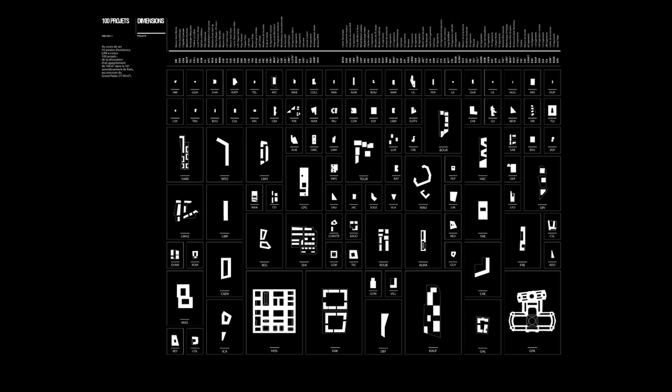So as you said, LAN means Local Architecture Network. We started the practice in 2002, then in reality it was 2004. We were extremely lucky to do, in like 15 years, more than 100 projects, very different in terms of sites and typology. This is the diagram of the ongoing projects, which go from 100 square meters to more than 100,000 square meters. As you can see here, there is just a selection of them.

We do housing, office, institutional buildings, theater, and museum. We are doing the extension and refurbishment of the Grand Palais, which is the biggest French museum, archives, prison, bank, fire station, and now we also do master plans, and we build part of the district that we designed.

So it has been a very interesting trajectory that doesn't put us in a specific field, which is a bit of a danger when you go out from school and start a practice, because they ask for references every time. So if you are lucky enough to do one project, the first one will be the one that marks your career.

So you start with housing and people believe you know how to do housing. In reality, you don't know anything, and you can apply the same method to whatever the typology is. But this world is built around...

...being reassured by references. The studio is a European territory, in the sense that let's say 40% of the studio are French, the rest come from all around Europe. This is a map that we update every year or every two years, or to be sincere, when we have time. But it's about creating and trying to represent the territory of the studio, the influence of everyone, and all the cities they come from to be part of LAN.

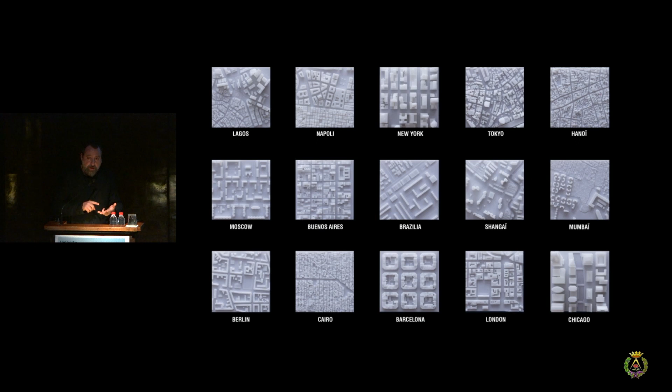He says two simple things. First, a city is a man-made object, so like all objects it has rules, physical rules, so you have to understand these forms. It's a scientific approach where you have to understand how things are made — the form, the materials, the period, the structure. So you can explain everything through an analytic approach.

But then he had another layer, which he called urban fact. Those facts are all the stratification of politics, historic facts, whatever level goes from that abstract image to this very specific one, which is about memory and identity.

So as an architect, in LAN, and I think in what I do in school, we try to understand both: the very technical and scientific approach that teaches us how to read the city, and then, as an architect, we decide which kind of memory we want to take and develop. So there is a level of subjective approach which stays in this second level. We try to be contemporary in the way we read the world and classic in the way we understand our work.

And everything is about form. Aldo Rossi says the city has its form and the urban fact has its form. And form is a word which is overused in architecture. Everything is form. The definition I want to share with you is the one of Paul Klee, who said form must on no account ever be considered as something to be gone over with, as a result, as an end, but rather as a genesis.

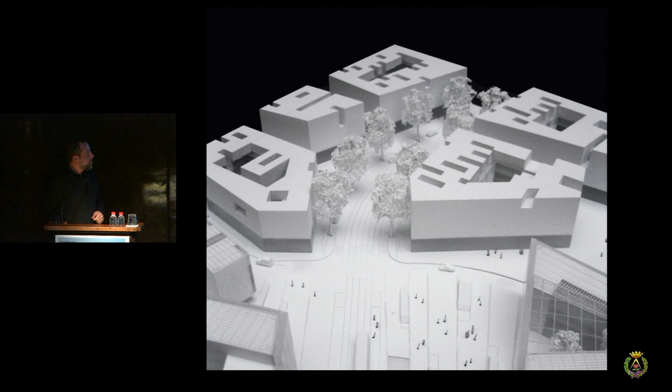And they did a competition on that, which was just for a master plan, won by a Dutch studio called Tania Concko, with a simple idea that in Spain and in Italy we know very well: a building is a mass, and the limit between public and private is the facade of the building. Inside it's private, and you can have a courtyard. So a building is a block, large enough to define, with its own standing, the public space on the surroundings. So she created these 3, 4, 5 masses to define the street, to define the piazza, and to create a model which was totally the opposite of the one that was there before.

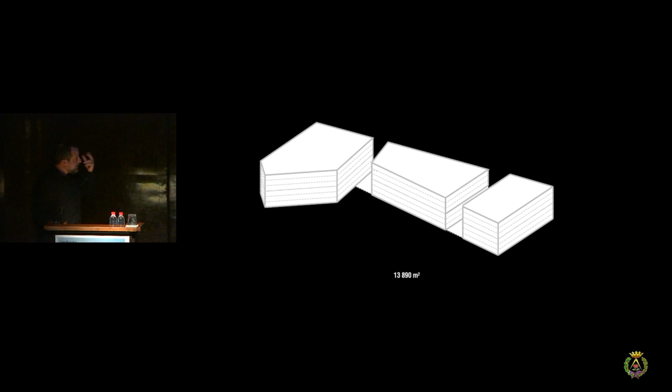So we were invited to a competition for these 3 blocks on the left. When you win a master plan in France, you set the rules, the urban rules, through which the architects have to build — you decide how high you can go, which is the density. So she built an entire system made to create masses on the scale of the public space. But the problem was that the competition allowed us to build 14,000 square meters, yet the competition was done in 2008, during the financial crisis, and the investor decided to ask for only 7,000 square meters.

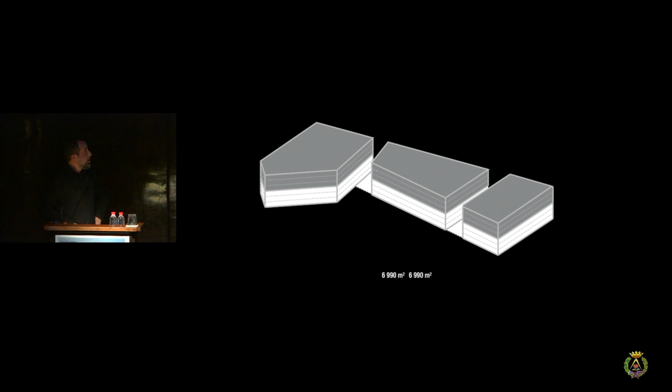So with a small house of 2 floors, or a building of 2 floors, we could achieve the surface objective. But it was very interesting for us because this gray space, this undefined space, was the beginning of a research that we did at the time, where probably it was before an intuition and then it ends up in a form. The idea was: can I combine together the quality of the single family house and the collective system? And if I have to pick up things from these 2 opposite models, what do I take?

The single family house is the fact that you have a garden, you have no neighborhood, you enter your property from the outside and then you get inside, and you are totally independent. The collective system is the fact that you share resources. You share water, you share electricity, you don't occupy the ground, you are dense, and you have the sense of community.

So searching about that, we ended up with this form, which was just superposing single-family houses, where whatever the flat was, it has a void, and the void which was on the left was sold with the flat. So you have no neighborhood, but at the same time, you share the structure, you share all the resources, and you could eventually occupy this void with time, through a kind of auto-construction.

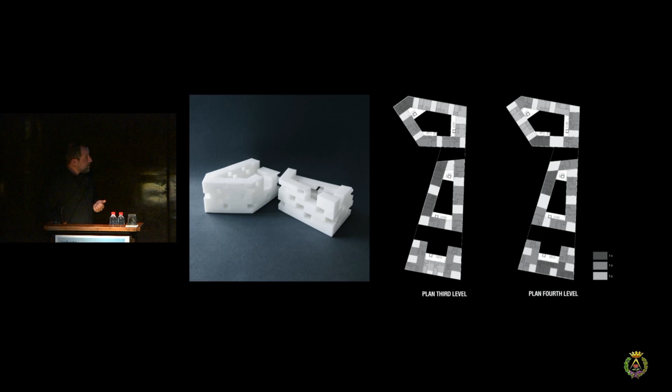So if the flat was, the idea was at the beginning, if the flat was 100 meters square, you could have 100 meters square of void that you can build with time. We were very, very young when we did this project. And the apartment looked like that, so it's fantastic.

The building is just 7 meters large, which is kind of crazy, because instead of paying for just 2 facades, you pay for 4 facades every time. So on paper it's extremely expensive. Each flat has 3 exposures: 1 on the street, 1 in the courtyard, and 1 in the garden, in your void, in your winter garden.

And I don't know how, but they let us win the competition. And we had to start this very long construction. It took 7 years because the only thing we had was the fixed price, and the fixed price was very low.

So it was like 1,000 euros per meter square, which is kind of the ratio of social housing in this area. But we doubled the surface, so we had to pay, not double, but you have to understand that we had to pay for all the void with the same money, and the money was already very strict just to build something which was very thin, 7 meters.

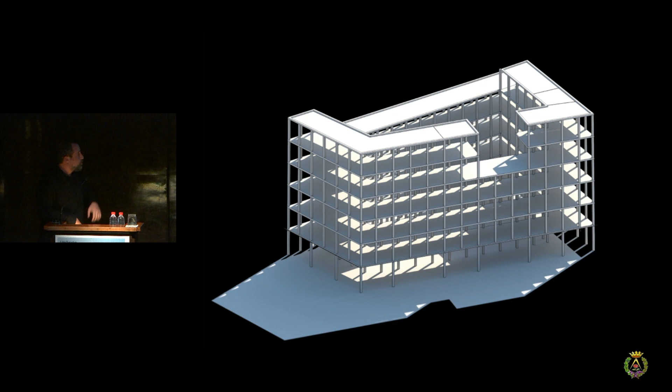So, as I said, we were young, so we started with a student process, like, okay, let's do a parking, and then we prefabricate everything, and with just 4 panels, I do the 3 buildings, and these things will allow me to spend less, which was not the case.

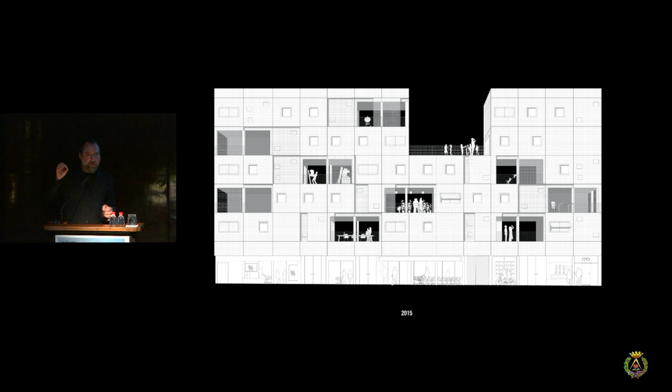We reached the objective just by sharing the market without the intermediary, which means that we ended up working with like 110 enterprises. There was a guy that does just the interrupter, and there was a guy that just paints the parquet, or whatever the action was, we were directly searching for the right person without any intermediary. But it takes a long time.

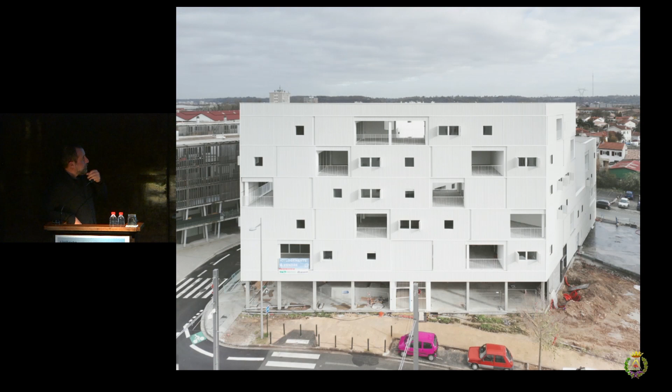All the flats are very different, but every time, if you look at the one on top, every time you have a void which is almost the size of your apartment.

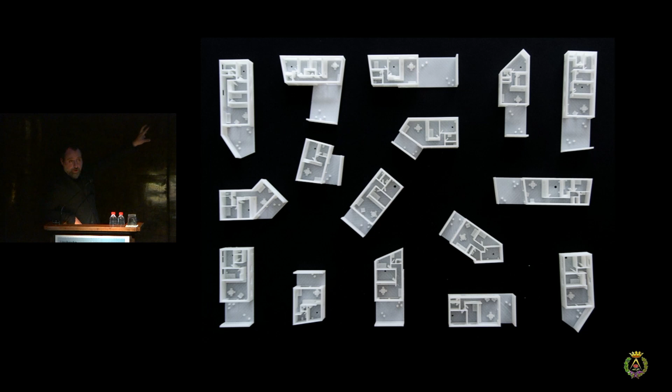So it was not about detailing. We really like that. If you see our projects, this one was made just with standard pieces. So whatever was the piece of the building that was on the market, in the catalog, let's say, the guardrail, the concrete in exterior, the one interior, the windows, everything is made with research on which is the best relationship between quality and price, and how I can put together all those pieces.

As you see in this one, the space that allowed the form to move is the void. It's the fact that people could start to build. I've seen—I don't have the picture—but the project was exhibited at the Biennale of Aravena, and we were there to do a film with the inhabitants. Some of them already built a small room for their new child or a kitchen outside, so the building has already changed, even if the exterior is still exactly the same, because we built the moving facade. So the place where the form started to evolve was this gray space, which was the void we allowed.

But that happened very rarely. Normally, when you can build, you build. So the second example I'd like to give you to understand this forming movement is a project in Paris, where each square meter is extremely expensive, in the last district, which is ongoing now. It's called Saussure, Batignolles, in the north of Paris.

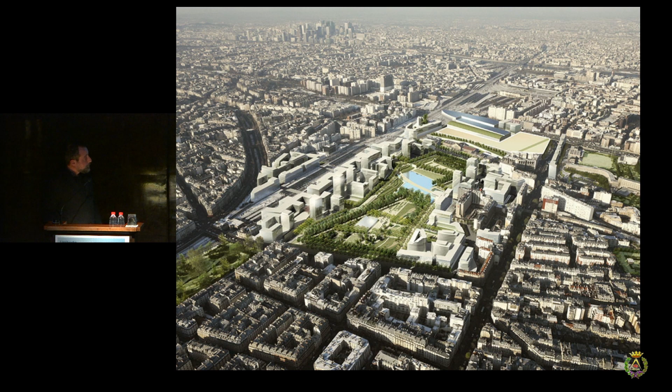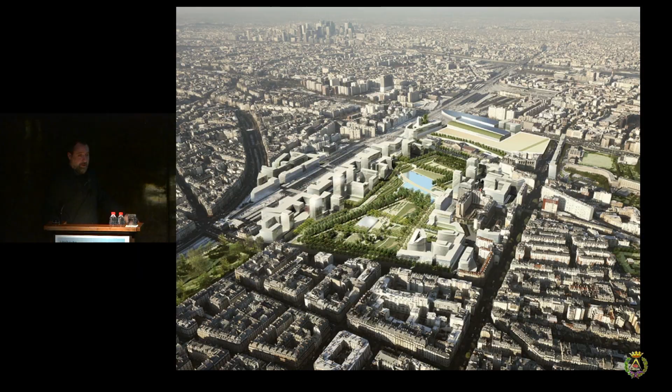We were called to design, in a competition, this small triangle on the left, the last pieces before the Haussmannian system. That was the image the city gave us in the brief. Honestly, it's very nice, but it's not Paris.

When you see this image, it looks like whatever district we've been building in Europe for 20 years. You have a park, everything is ecological, and you call different architects depending on the talent of each, they try to dialogue together, and they produce this kind of new, post-modern, ecological city. You find that in London, Hamburg, Berlin, Paris—wherever you go, you'll find an image like that. So when we started the competition, we asked ourselves: what's Paris?

That was the beginning of the research that later became an exhibition. But what's Paris? It's very simple: it's a city which is an extrusion of the ground, 24 meters high. It's the densest city in Europe. It's a city—we'll see this later when I speak about the school—built around the intelligence of the void, and it was built with one element through five guys, especially Haussmann,

that built from 1853 to 1914, 60 years. In 60 years, they completed 60% of the buildings of the city and 60% of the streets, which means the identity of the city was established in 60 years. 60 years is also the time through which we build a district now. You have to imagine that all those buildings were done in just 60 years before the war.

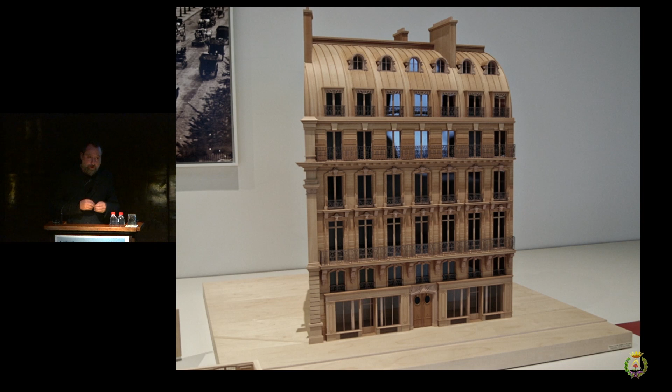I'll go into that later, but the tool for developing the city was what we called in France 'immeuble de rapport'—investment property. So for the first time, they started to build buildings without knowing who would use them. The idea was a financial approach where families built to rent, and then with the rent, they paid off the loan. The map you saw before—40% of it is built following this financial system. So it's called the immeuble de rapport, the building that makes you gain money.

And this building, in just two centuries, or 1.5 centuries, has demonstrated extreme intelligence in its form. It has become school, theater, gallery, shopping—whatever the function. It was built to be housing, but it's a resilient form that adapts to different functions, using exactly the same system and the same building. And it also gives the city its identity. It can become a block, or a building, or part of a block.

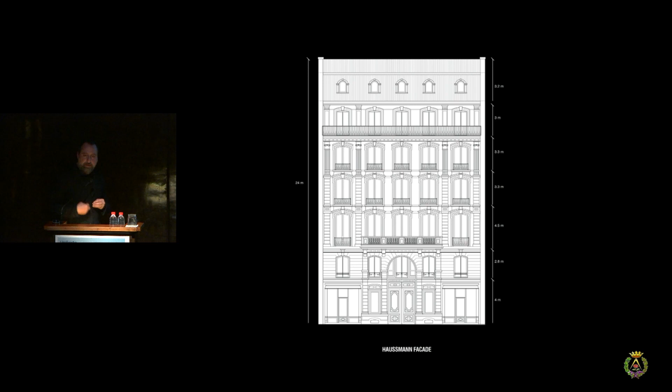So when we did this competition, we started to study what in this building allowed it to be so flexible, and how we could retranslate that in a contemporary way. The system is extremely banal and very simple. 50% of the facade is

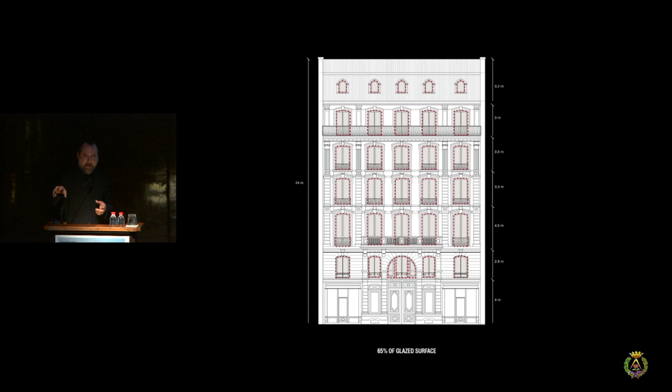in glass—it's empty. And that comes from a nice story I discovered afterward. To control development, Haussmann used to go to the notary office at the sale and say: whatever you do with your land, when you buy land, you have to have the facade continue the facade of your neighbor, with these materials and this kind of opening. So the architects designed the facade before designing the plan.

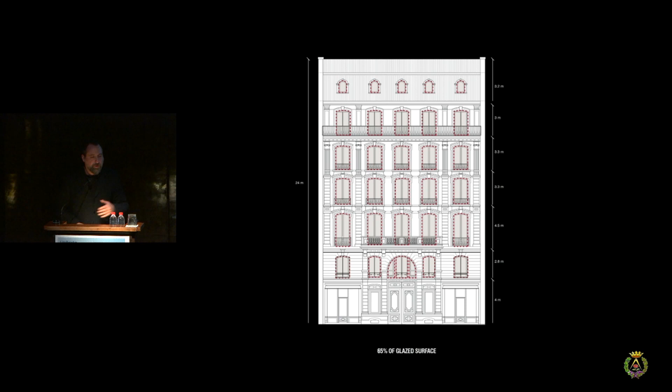And because of that, the facade is extremely flexible, because they didn't even know what would be in the back of this facade. So it's a regular grid, which can allow you to make a bedroom, a living room, or an office—whatever you want—because it's made on the idea that the space in the back could go from 20 square meters to more than 100 square meters. Then it's a compact system, which drives things we've lost since the war.

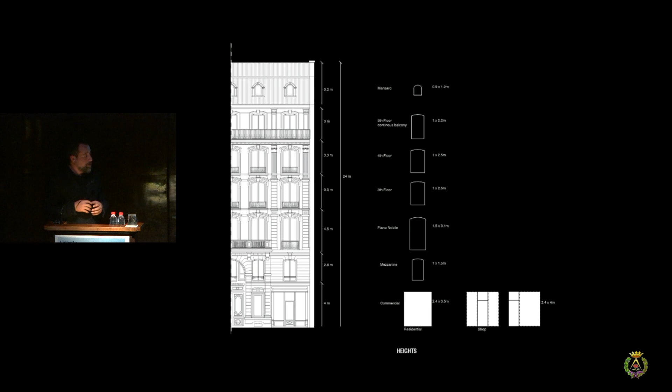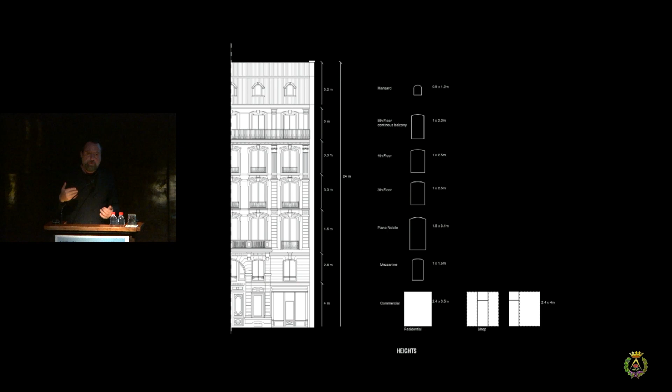Since the Second War and this industrialization of construction, when you do housing, you do 3 meters from slab to slab. When you do office, you do 3.6 from slab to slab. The buildings are totally monofunctional because the way we build is extremely based on standard.

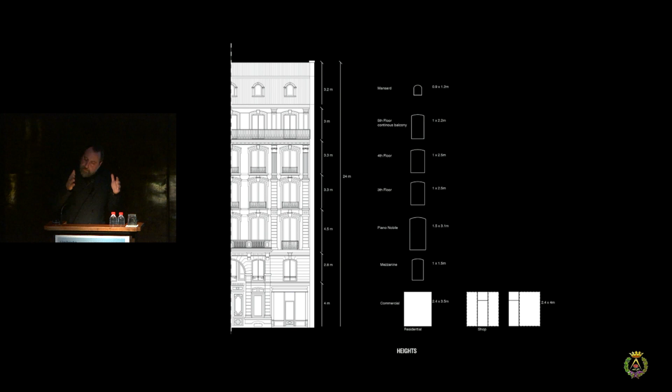What is interesting here, and what this building allows, is the fact that normally you have an office on the first floor, someone lives on the second floor, and there are students on the top with small rooms, which are called chambre de bonne. So there is a mix inside the structure itself.

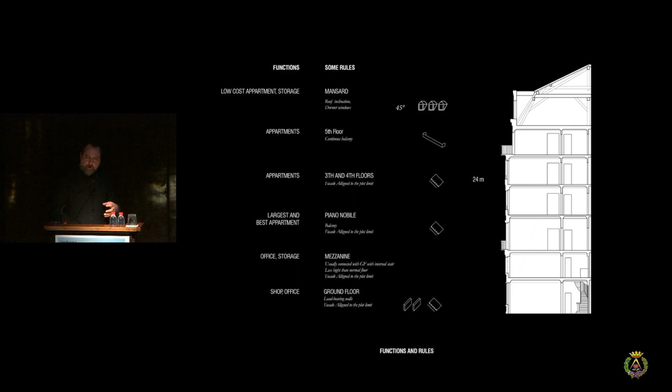And then it's totally prefabricated. In the exhibition, we found the catalog where people start to buy just the pieces of the building. So whatever investment you did, if you have money or not, the structure and the intelligence of the form was exactly the same, because the rest is just an addition by the catalog.

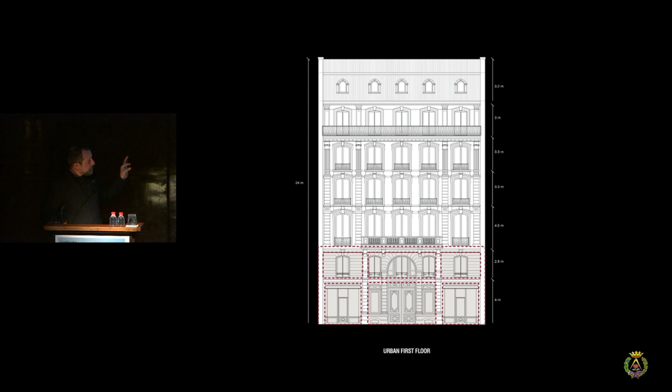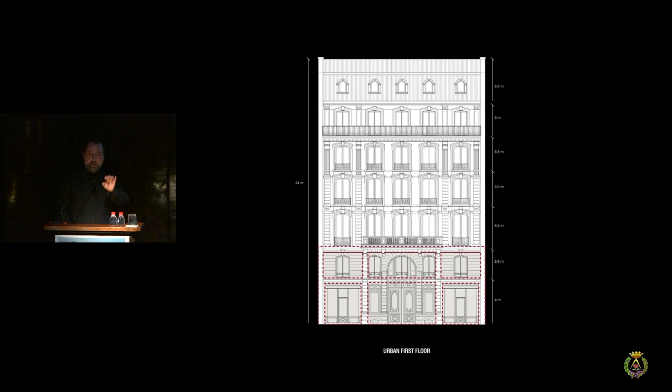The structure is very easy to understand, and there is this fantastic thing that the ground floor is connected to the first floor without using the common stairs, which allows the commercial surface of the city to double its size. So when McDonald's arrive, they buy the ground floor and the first floor, and if it's a small bakery, they just stay on the ground floor, and someone lives on the first floor.

And this is everywhere. You will see after, it's the base of what gives Paris the most elevated number of activity in Europe per square kilometer. It's the fact that every building is ready to host something, and it can double this surface.

That stands over the style, because it starts at the beginning of the 19th century, and it goes after the Art Nouveau. And it was clear from the beginning, because at the time it was a problem of social classes. So the buildings were conceived to have different range, different volume, just because people need different space and need also different trajectory inside the building to move, without putting together the servants and the bourgeoisie.

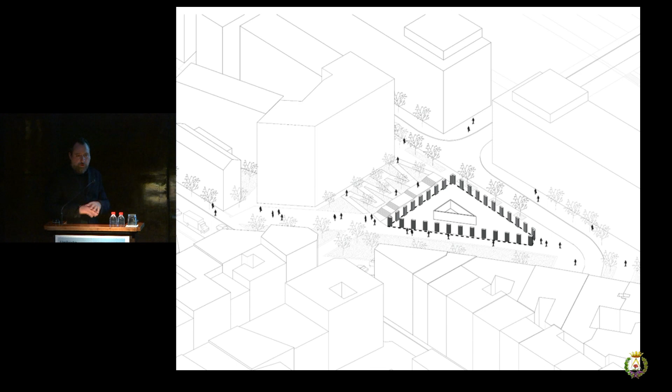So we tried to translate that in contemporary projects. We built up a system where the structure was in the facade, so totally free in terms of plan. And then we connected the ground floor with the first floor with an inside system.

And then we grew the entire building with only one window, and we calculated this window on the office standard, so it's 1.35, which is the standard used in Europe to build offices. We also gave the slab the possibility to take the same charge as office, which is more elevated than housing.

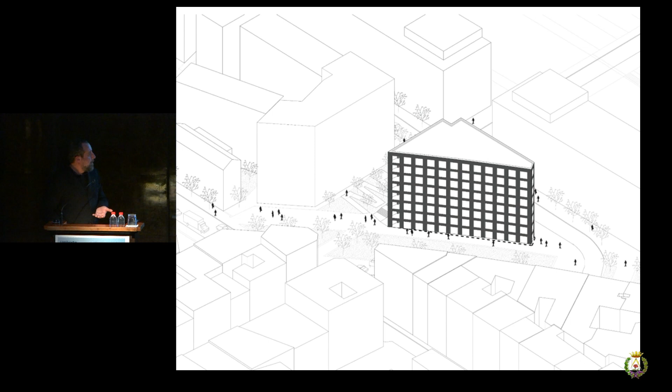And then when we needed a balcony, we just put off a loggia with the same windows in the back, or sometimes with a system which is prefabricated and you can put off. But this was the document of the competition.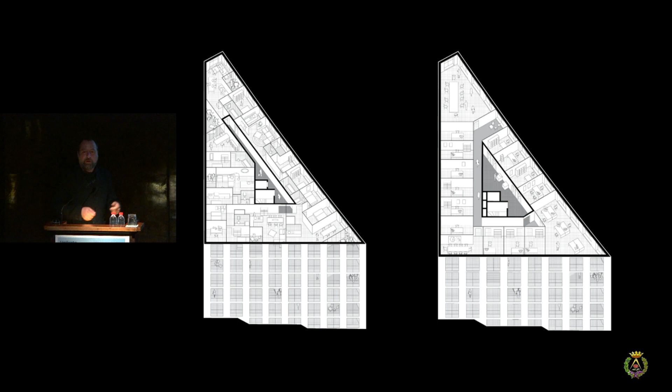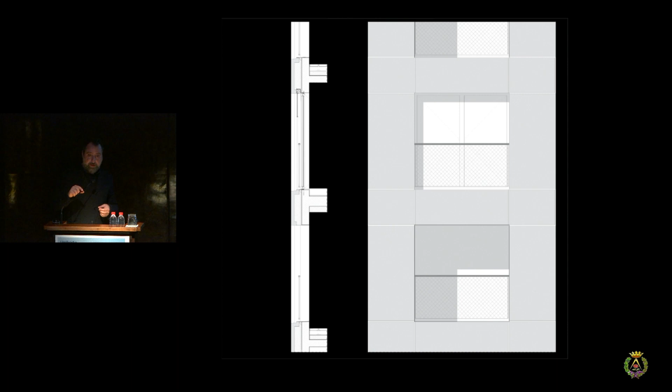It was very brave from us because no one asked for it, in a certain sense. They arrived and said, can you do a housing building? And we said, okay, we will do a flexible tool that can be housing on the left and offices on the right. And then when we won, we increased this idea of putting everything in the facade.

So in the facade, which is a prefabricated facade, you have the electricity, the water, the solar control, everything is in this first skin. So when you have to change something in 20 years, whatever the question you ask, you will find the solution in the module of the facade. Whatever plug you have to do, everything passes in this space.

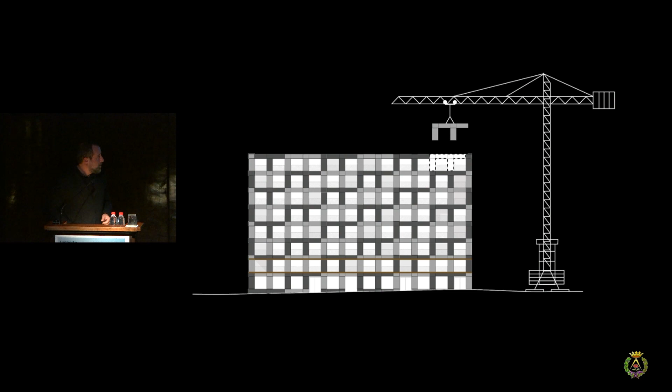And as you see, it's just a Lego, a composition of that. Then we moved the windows in function of the orientation, some loggia. And what's nice is that the plot itself becomes Parisian, we call that a corner building in Paris. It's like a catalog of situations in the city.

By the fact that we were free, the typology are very different. And it's not like when you do different typology, you also allow different people to come into the building. If you go from a very small apartment to a very large apartment, you will have from a very young guy to a very large family. And that's very interesting in terms of developing mixity in the city.

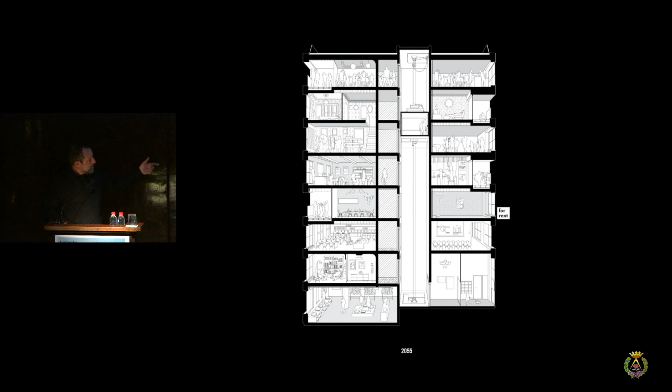And even if they were not conceived to be housing, the height between office and housing was 3.2, 3.3, and they are extremely qualitative because everything is glass and you have this view everywhere. And that was the section in 2055. So here the forms could move through the intelligence of the form itself, to the potential that we gave to this form to change.

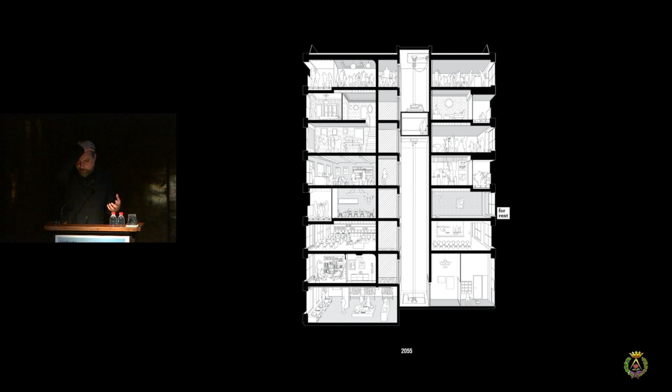And probably this obsession in me comes from my origin. I found this definition of Brancusi, which referred to sculpture, which said all sculpture are forms in movement, but you can just change the word sculpture with architecture. And I remember, I'm sure that in Spain you have the same.

There is this kind of development when you do single-family houses. In the south of Italy, where I come from, the landscape is just punctuated by millions of beginnings of something that one day will become a housing. But the nicest thing in this figure is the fact that the steel goes up, staying and waiting for an extra floor one day. So in the south of Italy, people build structure and build potential before they even build the housing, before they even build the family. They don't know who will be the child who will take this probably first floor, but I like the idea that the meaning of architecture is already there.

I will build something, but I will let the potential of this something become something else. And it's all just with the small act of leaving the steel and charging the structure to eventually get another floor. So you understand what's the movement of the form. The point is, how do you read the form and how do you choose it?

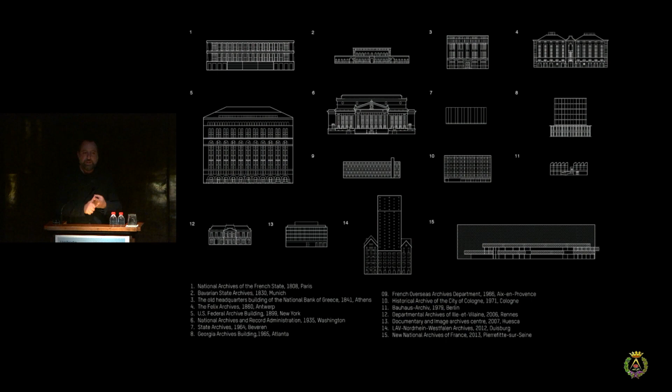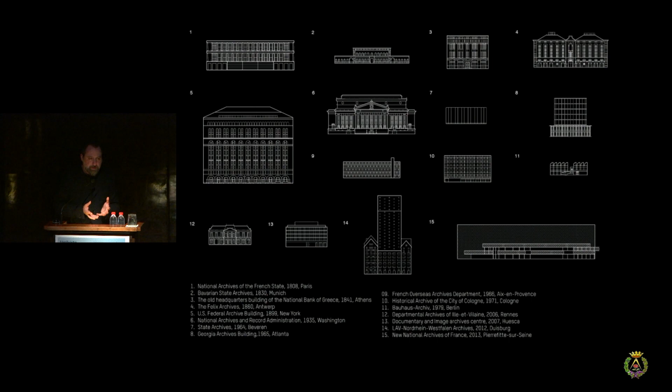So we went through the history of archives, and you will never find an archive of one floor in the entire history of archives, just because it's all about capacity, it's all about keeping a temperature and humidity. So you don't need windows, you need a compact figure, extremely utilitarian in the way it's done. And in this compact form, you have to have 16 degrees, so the less facade you have, including the roof, the more performing you are.

And when you get into this history, at a certain point you will discover that the majority of archives in the world are driven by Mormons. The Mormons have built their own fortune in doing archives, software for archiving, shelves for archiving, whatever is linked to archive. And why that?

Because they started this knowledge by archiving themselves. So there is the National Archive, the genealogical archive of Mormons in Salt Lake, where, I'm sure that there are no Mormons here, but if you are Mormon, all the information on you is in this place.

So I was lucky in that period. I had a few money on the side. I decided to take a plane. There was a festival of cinema there, called Sundance. So I went to see the festival, and then I decided to visit the archive.

And the mother of all the archives is a mountain, which is emptied in the middle with 2 doors. So it's like the maximum capacity that you can have, the center of a mountain.

So we were back in France, and we decided, also because when you are young, honestly, and you are invited in a competition, try to find every time an alternative way or you will never win. So we decided to not go for what they suggested, which was this terrace morphology, and build a big block of 5 levels, extremely compact, in the middle of nothing, because it was the middle of nothing.

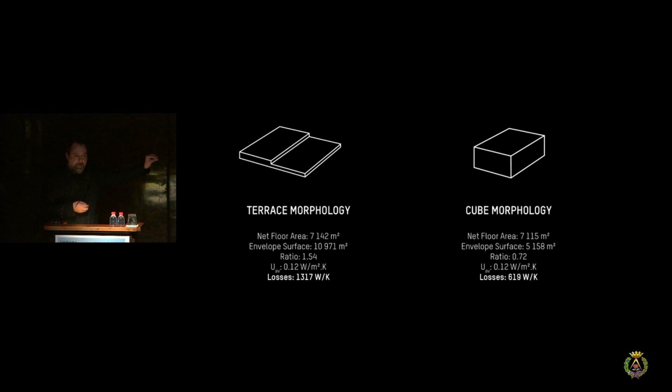And we did this pedagogical approach where we showed the client that for the same net floor area, around 7,000 meters square, the envelope surface, the facade, was double in the terrace morphology compared to the cube morphology, including the roof. And so whatever you do, before you heat or cool the building, you already need half of the energy. So just the form in itself was extremely interesting compared to the terrace morphology.

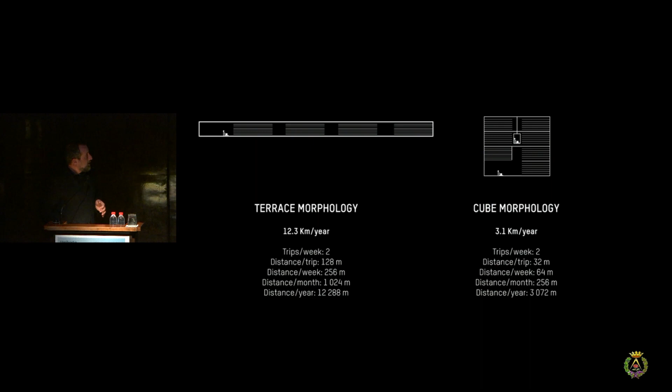Then we showed him that for 2 trips a week, the people that worked inside the building had to do 12 kilometers in 1 year instead of 3 kilometers. Obviously, there was an elevator. And then we showed that a flat building could occupy the entire ground and come closer to the street, which is the place where you perceive the building. Instead, a high building could be far from the street, and so by perspective, look smaller.

Totally fake, but sometimes you need it. But the real thing is, look at the plan on the right, is that you gain the entire plot. So we could use the natural slope to clean the water and recycle the water of the buildings.

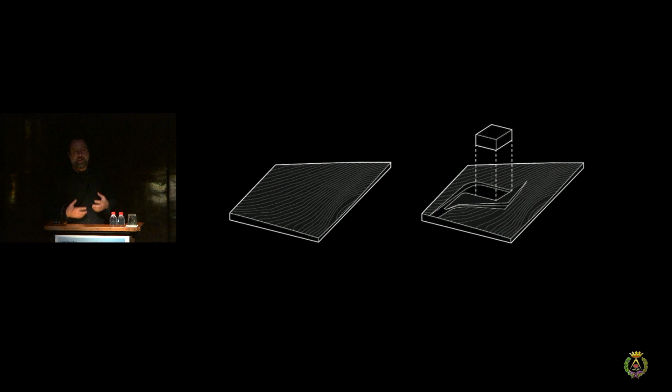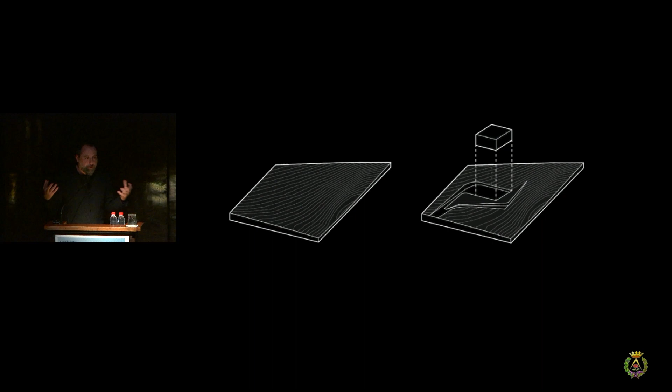And so we decided to go for it, and then at a certain point we said to ourselves, okay, but we will lose it. I mean, if we just arrive with a block in the middle of nothing, we will never get the competition. So we were like, can we use the surrounding to create something that kind of integrates this block with the nature?

And honestly, everyone came with the same image. Very basic, from the intern to myself, we were like, okay, let's do a chameleon. We were younger, but let's do a building that can change.

If the sky changed, the building could change. If there is snow, the building looks white or yellow depending on what's happening in the surrounding. We started this story by observing the skin of the chameleon and tried to create the same effect, mixing two materials, concrete with steel. From the steel you get the reflection, and from the concrete you get this strong connection with the ground.

That was the image at the time for the competition, where you see the green version, then the white version, then the greenish version. And then we did these details to show we know how to do it. Look at that, it looked very realistic.

And then we won, and we did it, which meant we had the patent of this facade, which was also a very pedagogic experience for us, because it was one of the first extremely technical systems.

But the first thing we did, and this is a suggestion for your students, is I called the client and said, we have no idea how to do this facade. That's very important, because for architects, people expect that we know everything. Sometimes I go to a dinner and there's a problem with a fountain, and someone says to me, but you are an architect, what about electricity, same thing.

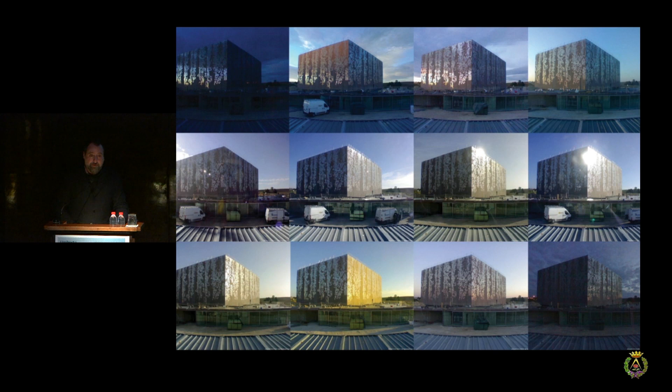So we did it. It was an extremely long process, and I will show you a movie of how you build one panel, to give you the sense of this epic adventure.

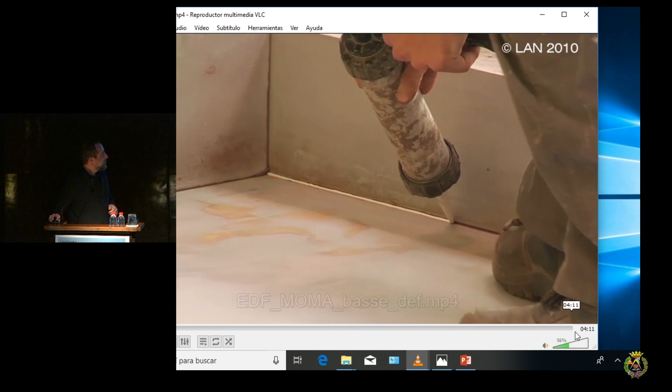Such a great tale. I read on the right, LAN 2010 - it's been 8 years that I've shown the same movie. By the way, this is the mold of one panel.

So the first thing we had to develop was the piece, the stud, which is a chrome stud. You have to protect the surface to have the mirror at the end, and you have to put it in a very precise position.

Then you have to build the structure in the back, and for this structure you have to develop the glue to make the structure without changing the chrome on the surface. So first we developed the glue, and second we found this anchor which resists traction and rotation.

Then an intern from the studio came and said, to find the right position, let's make a projector on the top which gives three points, a triangle, so you know where you have to glue these things. It's the triangle you see there.

And then we opened a position for the the village, saying if you want to come glue the studs. No one showed up, but it was like a democratic, participative approach.

So it's there, which sounds very easy, but we have made like 1,000 prototypes of these things.

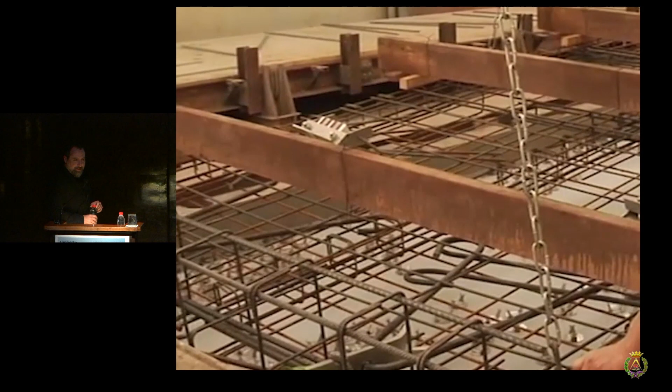It's a colored concrete that cleans itself. There is a material inside that doesn't allow life to grow there, and you put it on top, then you add the structure in gray. The panel is 18 meters long, which is the maximum that you can transport. And as you can see here, the film stays on the mold, and the other one stays on the studs.

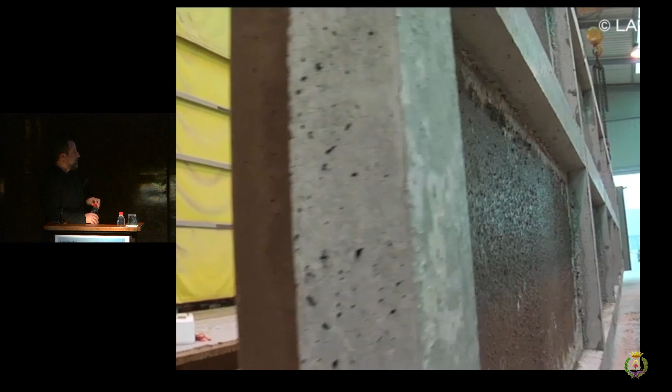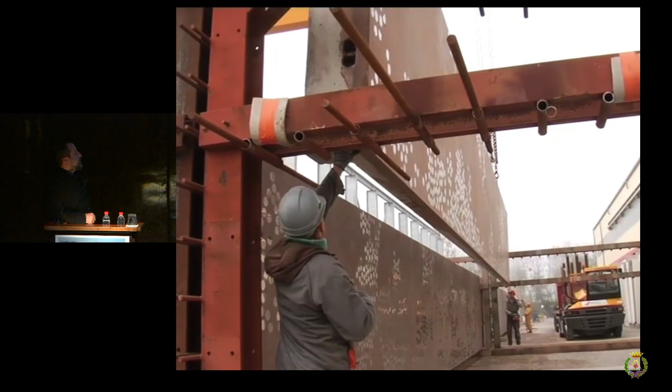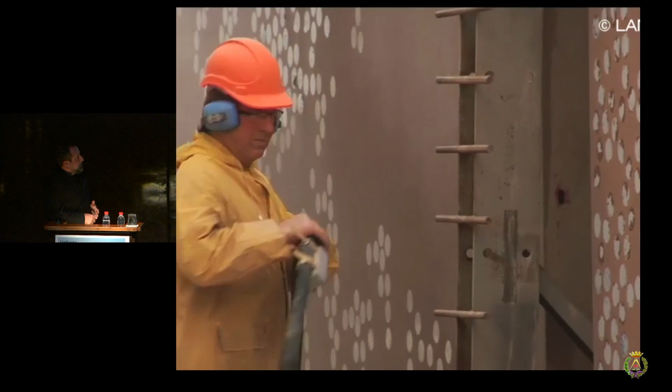One of the objectives was also to clean and sand the concrete to make it less artificial, to make the concrete look like stone, like the ground. So we made an additional pressure mixture between sand and water. That's why the second film.

As you see, we opened the surface of the concrete. Then there's a third move when, just with high pressure water, the studs will be cleaned. And you can see how the reflection works there.

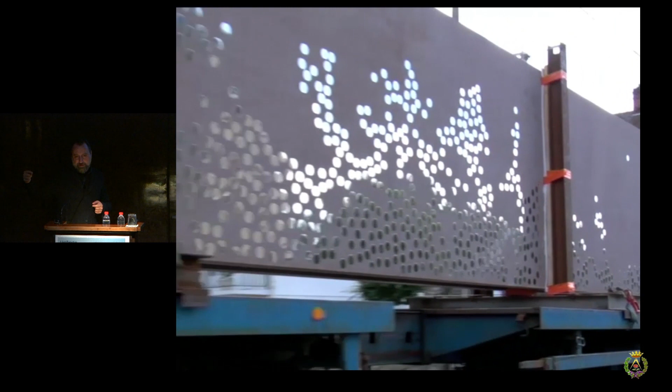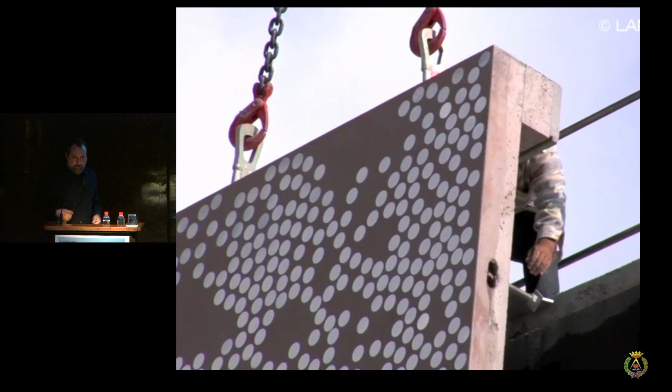There was only one guy who could build these panels, and he was in the other part of France. So two by two, they were transported from those places to the construction site, passing by villages like that. That's overscaled, but it's the same thing as whatever the cladding is, you put it straight. We had to develop, whatever you see in red, we had to design for the construction site because the panels were too big. Then you turn it and just fix it.

Obviously, the client was totally passionate, so he put millions of cameras on the construction site. So you will see 24-hour accelerated footage there.

What's nice, I think, is that without any windows, without any interaction, the facade still creates something with what's happening in the surrounding. You have to understand that one of the questions of the project was, this is a site that's not used. Things are there, and people come once a year. So, architecture without uses, is it still architecture or not? That was one of the main questions of this project. And I think the answer came... now it's very dangerous what I will do. Yes.

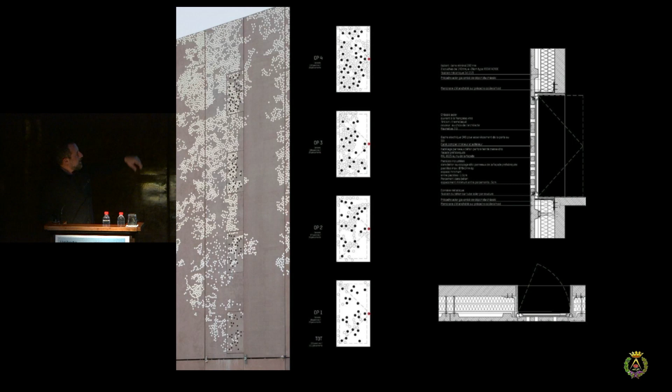Those are the details, the panel, the fire doors. We were really into design, even the limit. You imagine that with all this effort, the site is totally securized.

So the idea was how to hide the limit, and we used this English system called ha-ha. It's called ha-ha because people approach it and then fall in the hole, and they say 'ha-ha.' This ha-ha system is just an enclosure in an under-pressure part of the ground where you have plants, which allows you to see a continuous landscape without seeing the securization of the site. So the idea is to reach this abstraction. That's why I was speaking at the beginning of a form that has power in itself, where you cannot feel the scale.

You can blur your eyes and you see exactly the same thing. It's just an archaic form that's there. You cannot see the scale, you cannot understand what's happened, but something happened. Then you have the inside. Also, when the site is used, when trucks come to bring things, the logistic part is underground, so you don't see that from the surrounding.

Then there's an office where you enter here. Everything is around the patio. We had a lot of money to do this project—it's the opposite of the first one. So you are around this patio, and only 8 people work there. It's the most luxurious office you can find. Everything opens onto this panorama.

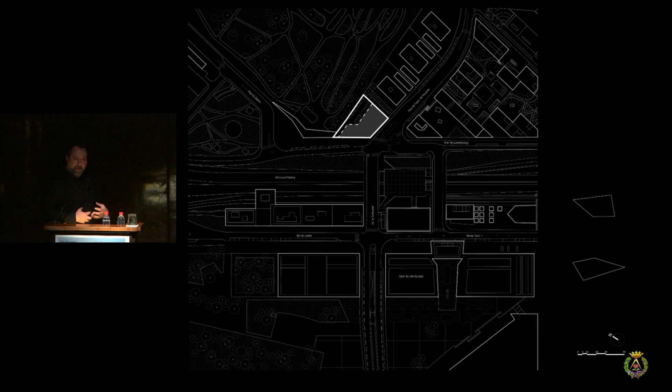So the building is the one you see there in copper, not the fake copper, the real copper. And it has been generated just by the forces of the site itself. We asked ourselves, whatever was the program - we really don't care if it's housing, office, or whatever. We work with formats that have to allow buildings to guess things. And if they guess more than what the demands are, it's better.

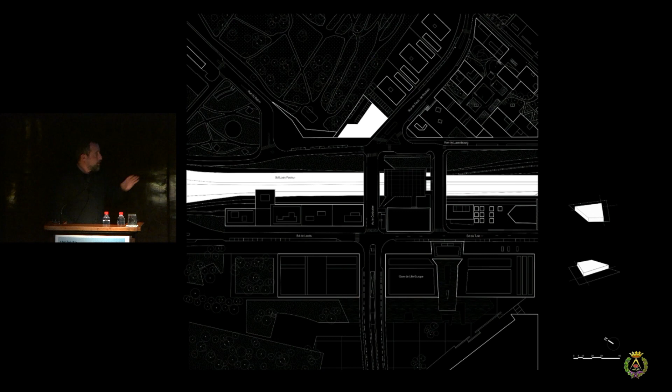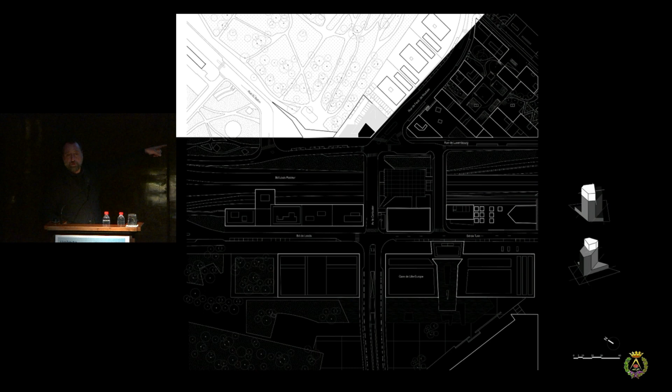So this one has been generated by the idea of being a very clear signal from the peripheric, from the highway, being a tower that has to complete the main axis, being the beginning of changing the scale for the development of the future, and being a corner building when you see it from the station. So as you see, a tower from the axis, a signal from the highway.

The beginning of the changing scale in the ground, where we constitute this switch, the corner building from the station, and then we changed the scale to develop this housing system on the right.

And what is nice is that it's an office building where there is no typical plan. Each plan is different, and now each plan is nice because it attracts people that were not supposed to be there - like small structures, startups, or even more interesting companies, etc. Just by the fact that you have different sizes, you can put together different kinds of demands.

The facade is very easy. It's made by the idea of highlighting what's happening 360 degrees on the surrounding, so they are made by windows. And there are 4 systems: one is total glass, the second is glass plus copper, the third is glass plus windows and copper, and the fourth is totally opaque. So that's the 4 system, and we turn this system.

Last one, and then we start to scroll. So I love this one because I think we cannot write that now. And this Lille project is a good step to show you what we think about materials.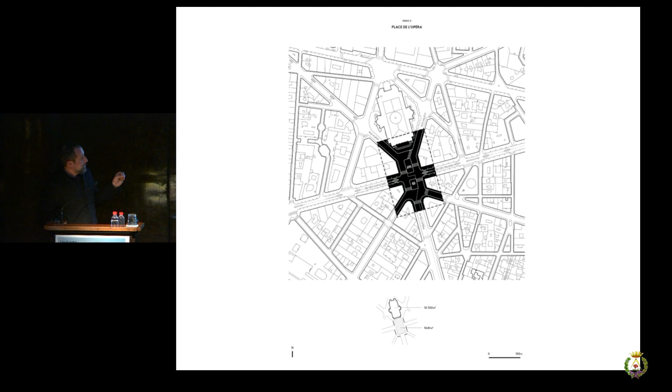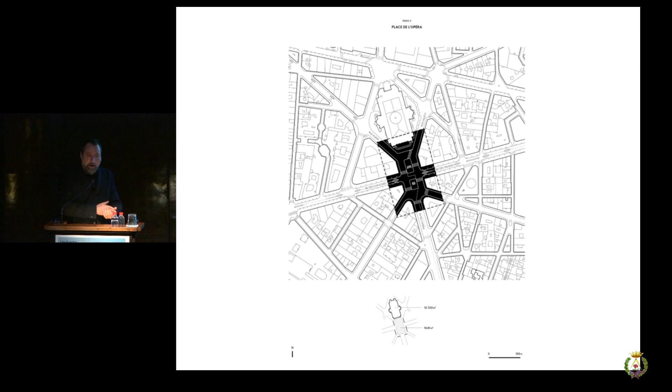And then I show them the conception of the public space. This is amazing in Paris. If you take Place de l'Opéra, the void has exactly the same size as the building. Place de l'Opéra has the same size as the opera. Théâtre du Châtelet has the same size as the theater, Place du Châtelet. La Madeleine's plaza is 3 times the same size as La Madeleine.

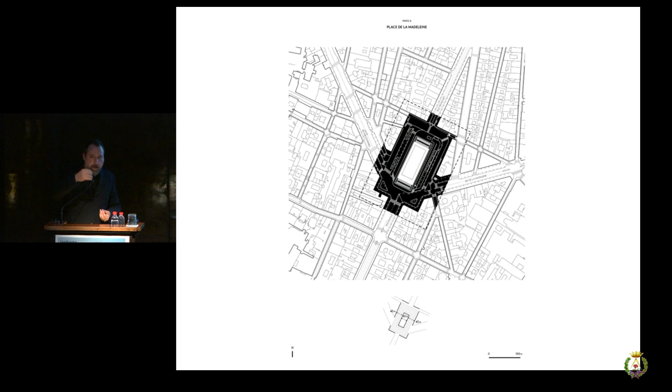There was a consciousness of designing the void, which was made by rules of 45 degrees, to allow the buildings to have light, to allow a certain dimension. The point in Paris is how you can make the smallest and most efficient void. So every time there is a kind of consciousness between what you have to build around the void and how you make this void efficient, whatever the scale is.

And then I explained how the services in the city work. We decided to use Paris as a model because it's the city which has the most elevated number of services per kilometer square, which makes the city alive - shops, magazines, libraries, whatever the things are.

How do the blocks work? The block is very interesting because it's an addition of buildings, but at the same time, it's by the fact that Haussmann imposed the facade, which also means he imposed the alignment, which also means that whatever the building is, the slabs are aligned. With time, the block is one building or the addition of 10 buildings, and this extreme flexibility was also a tool to generate this resilient system in the city.

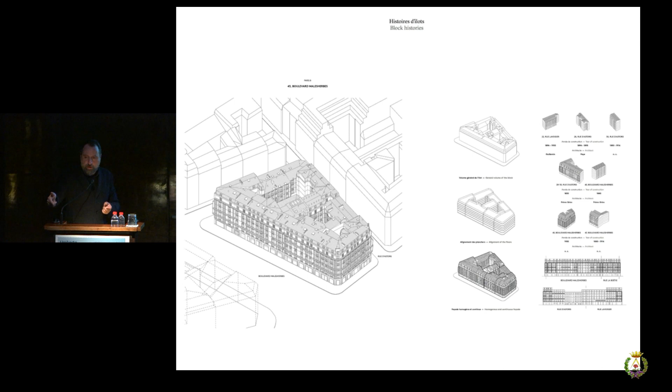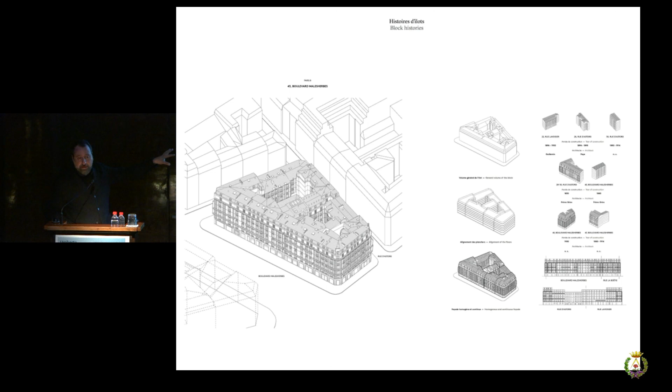So every time I challenge them, saying okay, your block, how does it work? Can I generate from your block another configuration in 10 years? What will happen, et cetera, et cetera. They can say yes, they can say no, but we started from this, just studying that.

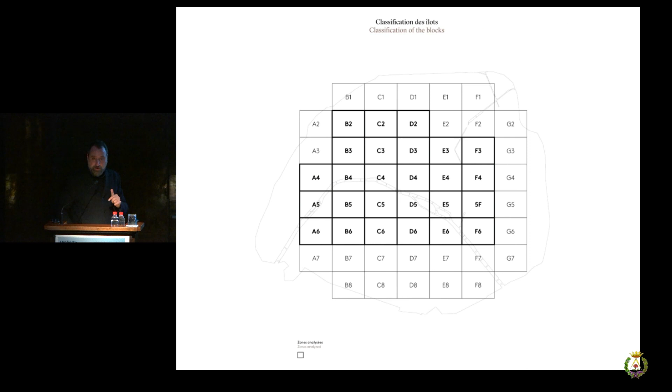And then, with the exhibition, we had to classify all the blocks to understand which were the typical blocks. We redesigned everything, classified by family - 6 faces, 5 faces, 4 faces, 3 faces, and exceptions. And you discover an amazing thing, which is whatever the form of the block, whatever its size, whatever its geometry, they have exactly the same density. From a block 20 meters long to a block 1 kilometer long, they have exactly the same density. You see the perimeter going up through 3 faces, 4 faces, 5 faces, and the density staying regular.

And this is because the ratio between the void and the built part is proportional, and the height is the same. So it's a fractal logic where wherever you take a piece of the city, it has, in terms of density, the same characteristic as the entire city. So I give them the objective to reach that too - to stay, whatever they do, they have to have the same density as the rest of the city.

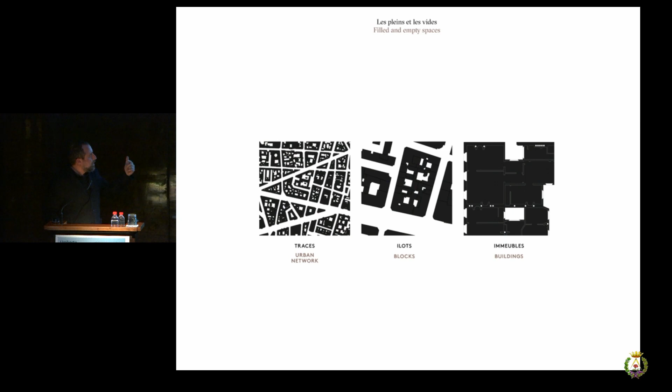So term 1 is 12 weeks, term 2 it's really practical. I'm just taking the slides for the presentation I did in September.

So we are in the term of 12 weeks where they finish the urban approach. They have studied what I just showed you, and they arrive with a master plan and a volume. I don't give them the program, they don't know if it's housing or office. I give them a thickness, they go from 12 meters to 6 meters, things like that.

And they have to build a narrative and a critical, analytical approach to their project without using one of the cards that students really love, which is 'I will make a co-working space, I will make a super student housing' — no. So it's all about: this is the city, how do you relate to the city, without using program.

Then in term 2, the programs arrive. So they will change their own approach because they will be confronted with housing in this system. And so what I do is very simple.

This year I have 14 students, I take 14 case studies. They have 2 weeks to redesign it, to understand how distribution works in housing and how typology works. Then they share this knowledge and start to design their own housing in the master plan they have done.

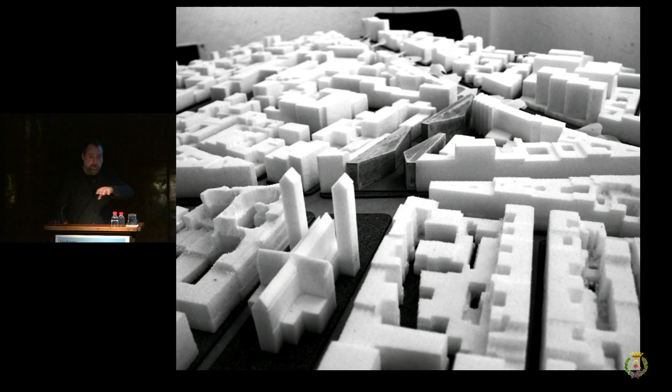So this year we have 12 sites, I just picked some. Every time, in Colombia I used to have one site for all the students. At the AA, because we have one year and not a semester, I decided to use different sites so they can confront themselves with different cases.

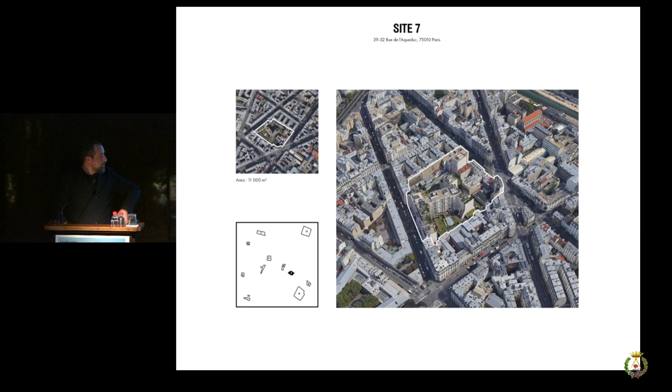And then in term 2 they do the building, and in term 3 they do the details and the materiality. And I will show you some images of what they have done in Colombia in previous years.

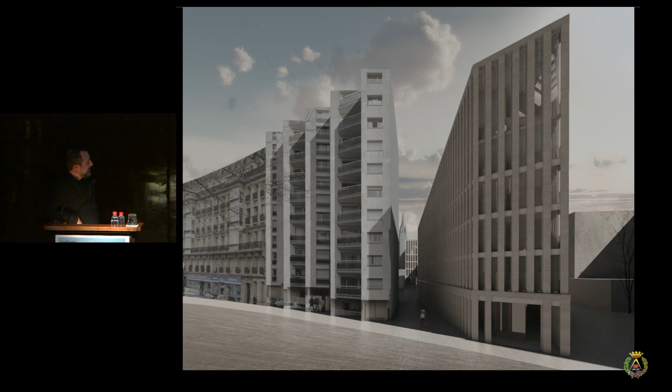Those are some student projects. Very LAN, I have to say, yeah? But it was not done on purpose. No, believe me.

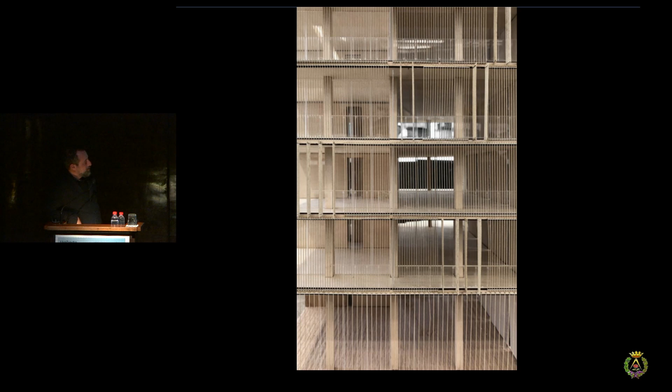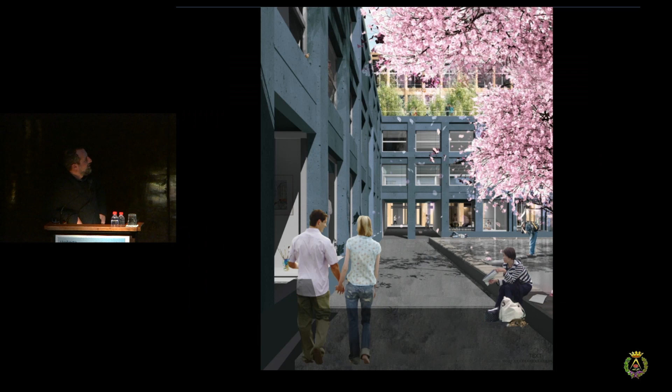And obviously, I ask for everything. Because the funny thing is, I don't know about here, but in Colombia, students work a lot. So you can really ask for what you want. You can even be cynical, say 'yeah, this is a horrible project.' But I show you this also to say that...

This was last year, so let me end. What I try to do is probably, I just found this definition, which I really like, a month ago. It comes from Auguste Perret, who is not a theoretician, but someone who, with his brother, had an enterprise to build in concrete, and then was the architect who built. You have millions of examples in Paris of fantastic architecture from him. Looking at eggs and speaking with a friend of his, he created a metaphor of what architecture is, which I think fits perfectly with our idea and what we do in the studio. Here is a model of architecture.

Auguste Perret tells me: show me a splendid ostrich egg made of an incredibly polished and fine material, arranged according to a beautiful curve. It contains a whole life, an infinitely complex mechanism enclosed within a perfect form of pure limestone, a simple form devoid of all ornament, a soft and serene form. The complexity inside is expressed by the shell, a beautiful material arranged according to a beautiful form. Such must be the beauty of modern architecture.